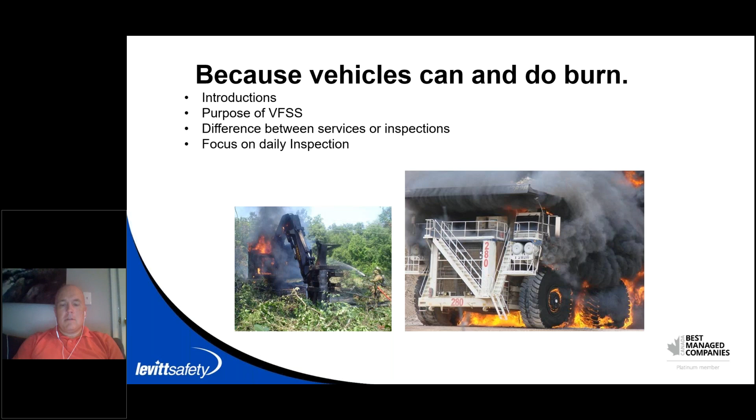So our agenda is, we've covered the introduction, why we have vehicle fire suppression systems on these vehicles, some of the differences between the types of services or inspections, and then really the primary target today is to make sure that we focus on what to do for daily inspections with vehicles.

So of course, we kind of touched on this already. The goal of a vehicle fire suppression system is primarily to protect the operator or passengers of these vehicles. You can find a vehicle fire suppression system anywhere from a mining vehicle, very large items like a shovel, the largest machinery out there, right down into, sometimes they even install them into skid steers. So systems can be very big and complex, or very small and simple.

They can be run with automatic detection systems, or they can be run just as a manual operated system. So they vary quite a bit, but especially when we talk...

Hey Derek, we're having a bit of a hard time hearing you here. So Patrick, if there's anything you'd like to jump in with at the moment while we get Derek's audio figured out, that'd be great.

Sure, no problem. So yeah, just to pick up on what Derek was saying on this slide, basically, if it can roll, it can have a vehicle fire suppression system on it. What Derek was saying is that we cover machines from the largest ones, the large massive hydraulic shovels, all the way down to even the small skid steer type equipment, forklifts, that sort of thing, and everything in between.

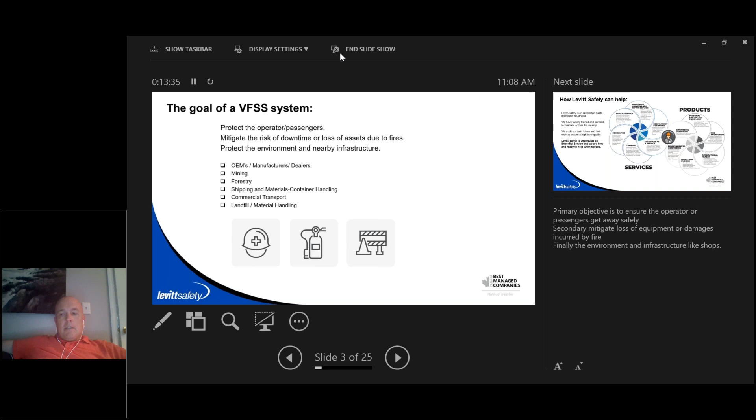In other markets, the machine's not running that often, but like in forestry, that feller buncher is out in the middle of nowhere, and you want the peace of mind that there's a fire suppression system on board to help that operator out in the event that there's a fire. So each one brings its own challenges to the marketplace as far as the demands on the fire suppression system.

I thank you, Patrick, for filling in there. Hope everybody can hear me a little bit better. You're still cutting in a little bit here and there. I guess it was just unstable coming in. Better? Hello? You sounded good, you sound good right now. I sound good now, okay. Don't move, just trying to shrink down. Can you guys also - I had a little bit of an issue on the presentation portion, just so I can confirm, is everybody seeing the presentation only, or are you also seeing my menu? Yeah, you're good, it's just the presentation only now. Okay, great, thank you. So thank you, and again Patrick, for filling in there, really appreciate it. You covered everything better than I would have.

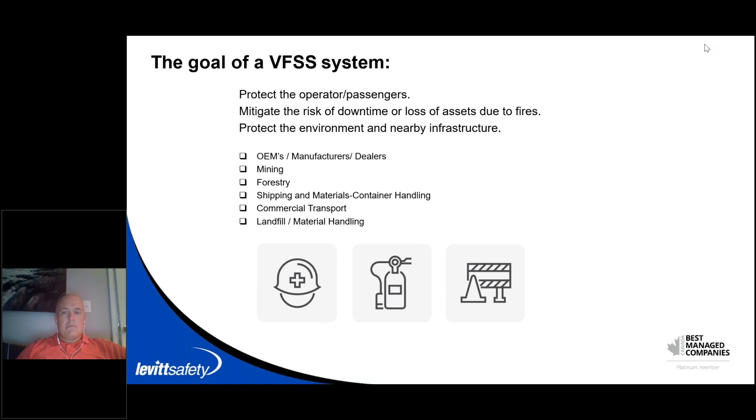So Levitt-Safety is a company - we've been in the industry 85 years as a fire and life safety company, and really been a big part of vehicle fire suppression systems in Canada here for 50 plus years. We have wonderful strategic partners like Kidde who help us bring this to market, and we become an authorized distributor through the Kidde network. That allows us to train our technicians through them, factory trained, and we also do internal auditing of our technicians to make sure they're capable of doing everything they need to do, not only in a classroom setting, but in the field as well. So that's offering you, the end user, the highest level of quality we can assure.

And we're situated across Canada from coast to coast, able to deploy in the most remote locations. Even now, during COVID, we found innovative ways to help support this, whether via FaceTime to a mechanic in the field, or webinars with engineering firms. We've done lots of different transitional things to help support this during a time when we can't necessarily be on site.

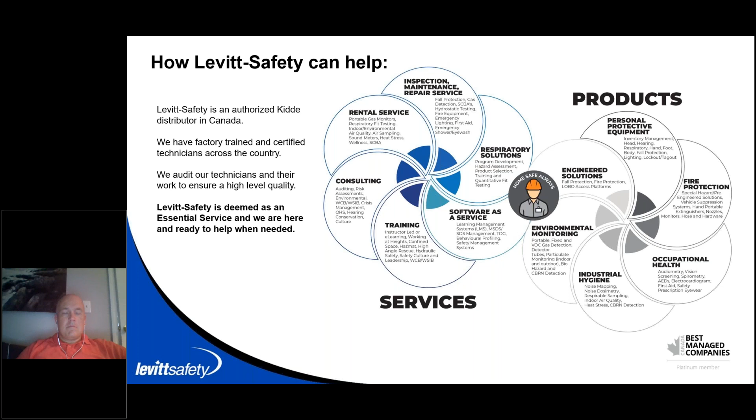So with the service and maintenance overview, I touched on this earlier. There's a daily, weekly, or monthly inspection that's going to be done. That's primarily done by the end user, the operator, or a technician, with different weekly or monthly checks or more detailed daily inspections.

Sorry, Derek. One of the tricky things with working remotely is that we can't always guarantee how great the internet access is going to be. Patrick, would you be able to hop in here? Yes, sure, no problem. I was just going to ask if you want me to translate for all the panelists on the call.

So what Derek was talking about on this slide is the operator, the system owner. They're the frontline maintenance crew, the honorary service crew for the fire suppression system, and we need their support on a daily, weekly, and monthly basis, keeping an eye on the system and making sure it's properly configured to provide top performance on board the vehicle.

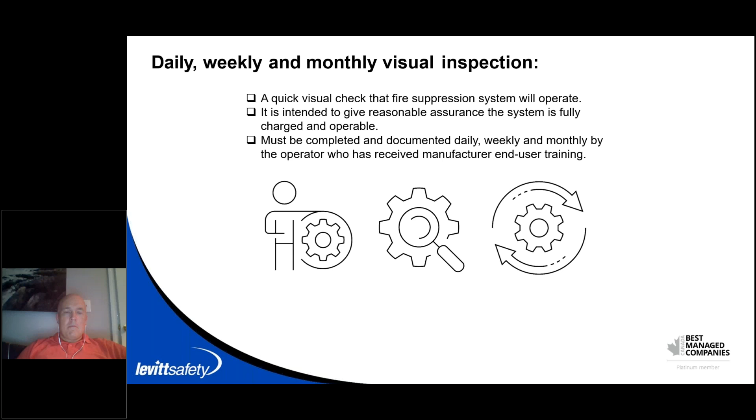As you go into a more weekly and monthly routine, you covered the 6-month or 1,500-hour maintenance portion. This gives us the assurance that the system's operating at its maximum capacity. This needs to be done by an authorized Kidde distributor, and Levitt-Safety would love to come out and do these for you on whatever interval basis works for you.

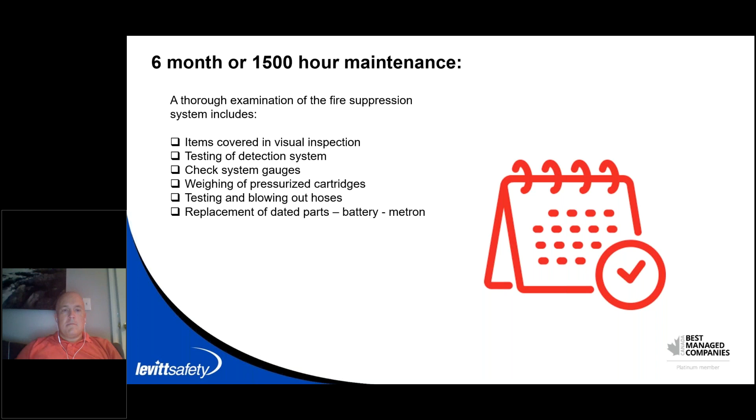In this one, we're doing a little more in-depth work—actually blowing lines and testing all the devices to make sure everything works. So we're bringing that system right up to its full capacity from where it should be at install.

And then on that 12-year interval, as Patrick touched on, we're doing the hydrostatic testing, making sure all the hoses still meet the criteria they need to meet, that the tanks are all in perfect condition, and that the agent, if needed, gets replaced as well.

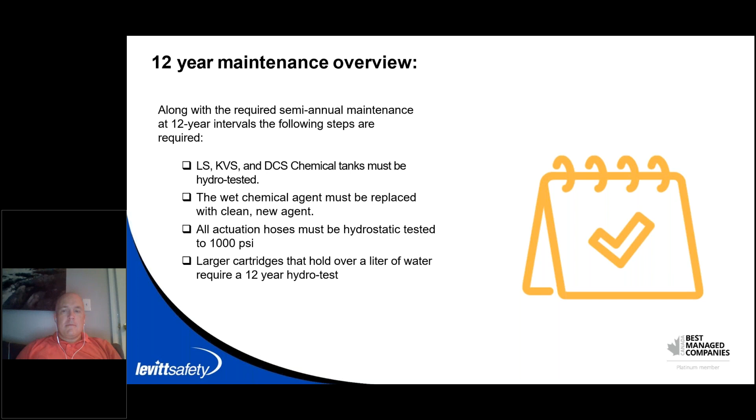Still being able to hear me okay? Yeah, you sound good. Excellent, I finally found the sweet spot.

Okay, so we'll go right into the inspection portion, and I think this is really where we wanted to key in today anyway. From an end user perspective, this is what you should be doing on a daily basis to make sure these vehicle systems are running the way they should.

It's a check for all the components, making sure there's no physical damage or degradation you can visually spot, or anything that looks out of place. For the most part you can use a checklist to go through these components, but if you spot something that doesn't look right, trusting that gut intuition is important too—report those things to your supervisor, who will likely be in touch with a Levitt-Safety person if anything is out of line.

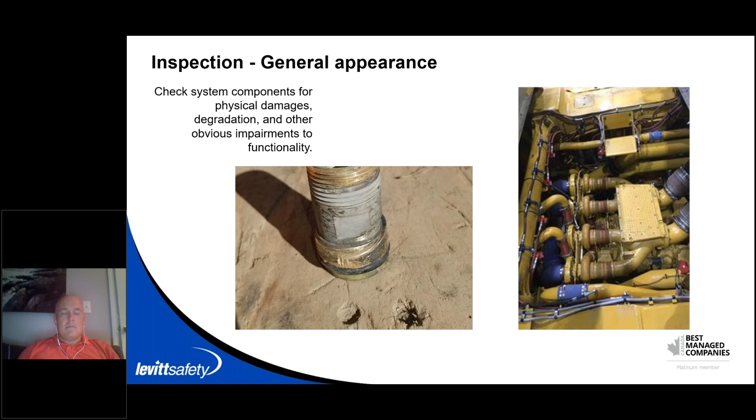The first part—you can do these in any order, and you'll find it'll probably work as an operator comes onto a vehicle, doing certain things at certain points—but we're just going to go through this as we've put it together. You can, of course, vary this in any way you'd like.

So, tanks themselves: there are a couple different tanks out there, different sizes, different shapes. The Kidde line is all a stored pressure unit, so you'll find they all have a gauge on them, and that's one of the things we're going to be checking.

This tank here in the picture has obviously been through the mill something fierce. It's taken extreme damage, but it actually shows a lot of what we'd be looking for in terms of impairments—any obvious physical damage, rust, gouges, dings, or abrasions. These are the extremes, with massive dents and lots of different cuts and abrasions. On the gauge itself, there's a green area that you want to keep that gauge within.

That will fluctuate a little bit with Canadian temperatures as we see extremes of -40 to +40. So there is a temperature differential chart we can provide for those seeing extreme cold, which might come out of the green a little bit, but it's still functional.

Otherwise, you just want to make sure all of the head's in place, that it doesn't look off kilter, that all the hosing going in and out is in good shape and secure, and that the tank doesn't look physically damaged like this one.

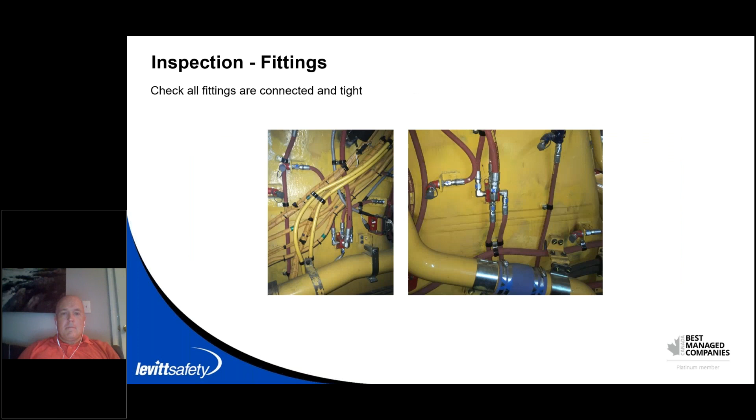From those fittings, that's where the distribution network heads out into the hoses, and the hoses then take it out to all the nozzles. When you're looking at these hoses, you can see how they're secured with P-clamps, and they shouldn't interfere with other pieces, hoses, or wiring that might be in the vicinity. It's important to make sure they stay secured. Otherwise, you might end up with abrasion from hose to hose, or anything else it might be rubbing up against, and that can cause either damage to the fire suppression system or damage to other components of the machine.

So we just make sure those hoses are intact, that they don't have big wear spots, and that they don't crack within your hands. As these things get exposed to multiple different fluids from an engine compartment, or extreme hot and cold, they do tend to deteriorate over time. So it's something we inspect not only on a daily basis from a visual perspective, but also something we look for during our full-on inspection.

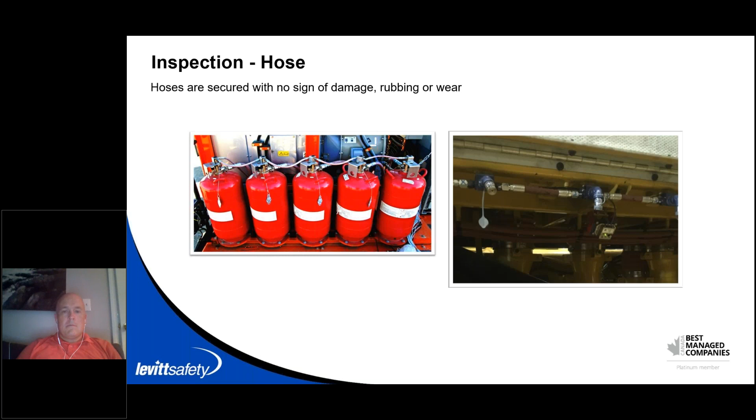These are what you'd be looking for to report to your supervisor should you see anything like this. You want to make sure it gets corrected sooner than later. Don't wait for your next interval if you see some nasty stuff happening.

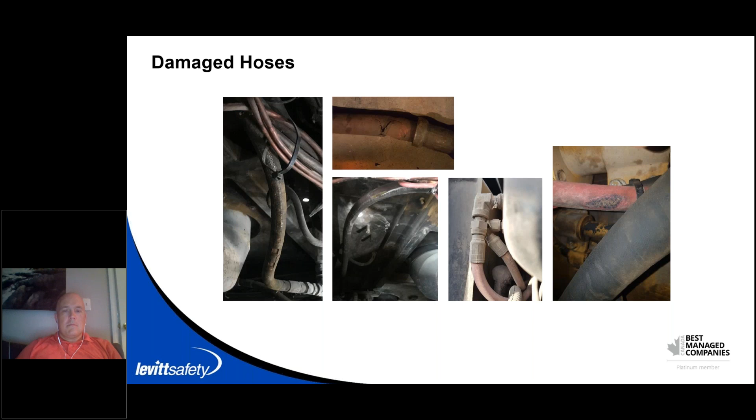The difference is that a pneumatic system offers that ability no matter what the system's condition is. If the panel is offline, you're still able to actuate the system itself. Whereas with electric, you rely on the system being in that powered-up position in order for them to be operated.

You also want to make sure, as it says on the label itself, that the pin is in place and has a seal or indicator that it hasn't been tampered with. We install those during our 6-month inspections, so those should still be in place whenever you come along.

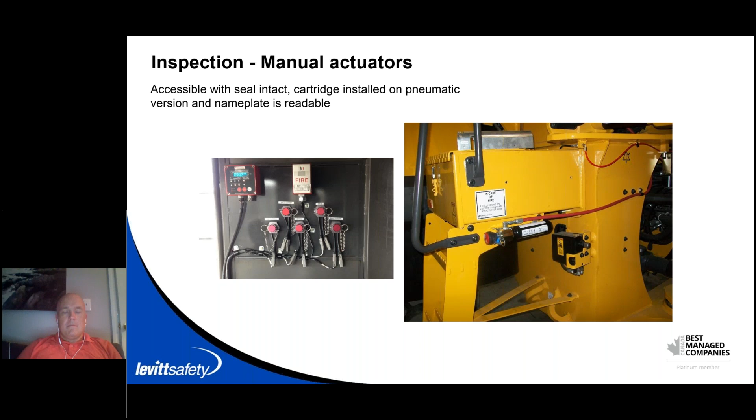They're actually even visible again. So it's important that on a daily basis we're making sure that especially the ones at your points of egress are free and clear of debris.

Discharge nozzles—this is another part of that distribution network. These are very critical in their placement. You want to make sure that when you're looking at them, all the caps are in place first and foremost. That's what's protecting these systems from getting debris back into those hoses, or even water, which can impair the distribution of the chemical.

You want to make sure the caps are in place, and also that the nozzles have a mounting bracket like you see in the pictures, and are pointed in a direction that looks like it's headed towards a turbo, exhaust manifold, or starter, something of that nature—not impaired, like Patrick mentioned in the previous slide, since sometimes modifications happen and suddenly that nozzle is blocked by something stuck in after the fact.

So if you see any nozzles pointing at just a blank chunk of angle iron, for example, that might be a reason or something to bring forward in your inspection notes.

Yeah, absolutely. If it doesn't look right, it's probably not right. That's the short takeaway. And those are all shipped with nozzle caps, and that's to keep the nozzle outlet from getting clogged with debris. So if you see a cap is off, besides just putting it back on, you first want to look inside and make sure you can see the inside of that nozzle, so that when there's a discharge, the agent's got a clean exit path out into the engine compartment. If it's clogged up with mud, or if it's wintertime and there's ice on there, then there's not going to be any agent coming out of that nozzle.

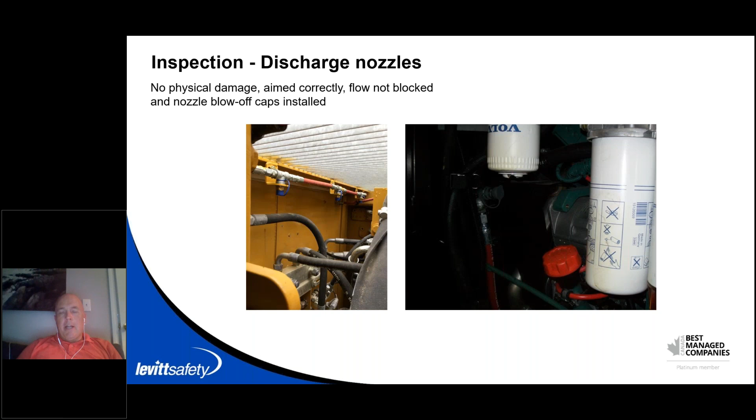Yeah, exactly. So we'll move more over to the electrical side of these systems. As systems get a little larger, or equipment gets larger, the system usually gets a little more complex as well, and that's where you'll find a need for different types of panels.

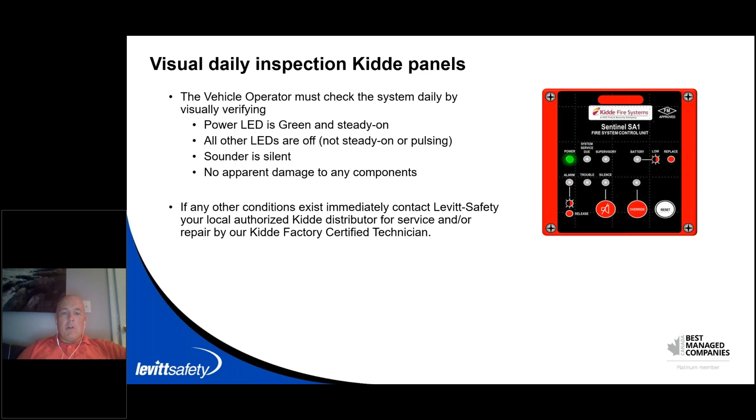And the only other thing I would say is, from talking to our distribution network over the years, these panels seem to be a magnet for hats and lunch boxes, coats sometimes, and you really want to make sure, just like the actuators, that there's clear and unobstructed access to these things. So they're easy to quickly see, and there's some level of interaction the operators can have with a silence button or an override button on there. So it's important that it's not covered up on a day in and day out basis.

And some folks think that it's an entertainment system, and they try to open these up and hook up their iPhone or other media device on there and listen to music or something like that, or they do other things to it, and it's not there for entertainment. Its job is to make sure that the operator is safe and the vehicle can return to service every day, and that's its job. It doesn't want to do anything else but that. So just let it do its job, and then you can do your job.

Yeah, right. And again, that takes me back to my days in the field, where these are very often used as some sort of hanging system for various things, whether it's a hat or a paper towel roll or something. But yeah, make sure that we're not obstructing them. They're there for a very critical reason.

And who knew that 3 red cherries weren't a winner?

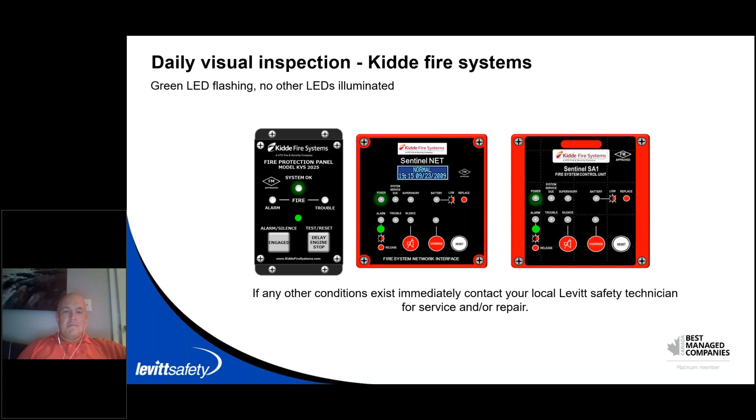So coming off the panels, one of the things that we do is an automatic detection circuit. These circuits come out from the panel. They're monitored so that we know if they've been compromised, and they operate in a normally open, normally closed fashion. So that'll send the signal back to the panel to let us know if there's a condition in the system and set the panel off.

The detection system is what gives us the capability of detecting fire scenarios at an earlier stage, usually, than if we're just reliant on an operator visually seeing smoke or something of that nature. This can pick up heat, that sort of stuff. And it's really critical that if we have one of these, we're making sure that the circuits themselves or the devices are in good shape.

So there's some different methods. There's linear detection, which is a fixed heat, and you want to make sure that linear wire is strung through a compartment the way that it should naturally be going. It has all the bracketing in place, that it's covering over components of the machine like the turbo or whatnot, but not too close in proximity. If any of those brackets are broken, that could also hinder the ability of it to function properly. So you want to make sure that it's not cut or doesn't show signs of heat or even abrasion.

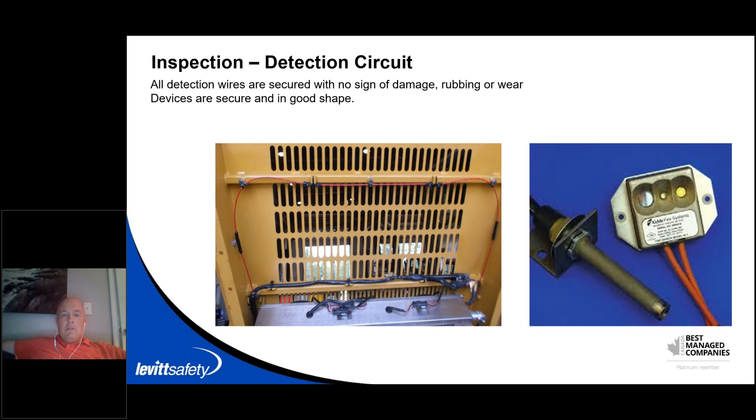Here's some good examples of damaged detection wire. You can see here where you've had some heat issues or abrasion. Some of them might not show obvious heat damage, but you can see the darkening of color. Sometimes that happens through time.

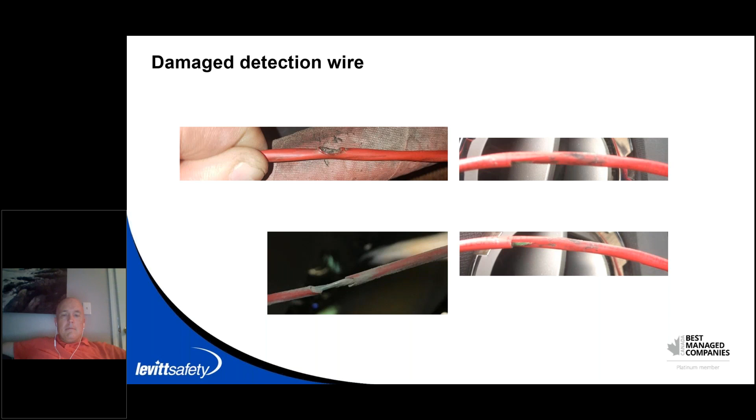The way these things work is that they're shielded wires, and once they reach a certain temperature, they make a connection, putting it into that closed position, and that's when the system will go off. So as a daily check, you want to make sure those things aren't happening. If you catch it before it happens, it'll prevent false discharges. Something to really look for when you're walking through your vehicle.

You just want to make sure all that wiring is secured very well, that all the connections are in place. If you have the time, this is probably more on a weekly or monthly basis, more of a mechanic sort of thing. Give each of those connections a little tug or even just a wiggle, make sure they're not falling apart. We primarily use Deutsch connectors, so make sure they haven't come apart. That's all very critical to do.

Some other things you'll see out there are the horn and strobe equipment, where it's important to let people around know the system has gone off, not only from the cab but around the entire vehicle, so you can hear it and visually see it. These should be visible, and you want to make sure the strobe's clear. During an inspection, we would check that the audio is in place, that they're still hung and secured.

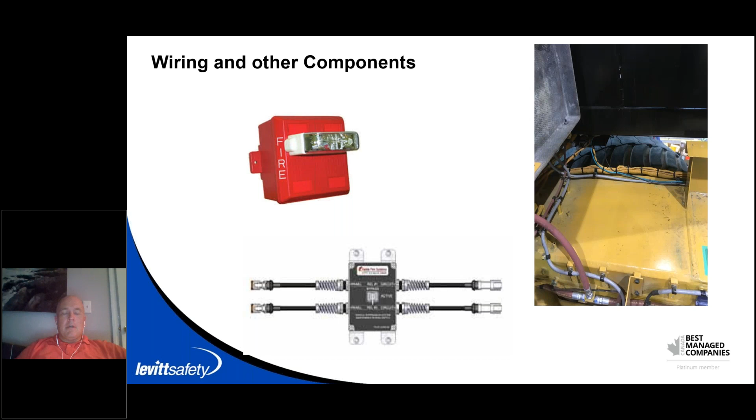On the maintenance bypass switch, or any of the other electrical connectors, like you said, most of those are all Deutsch connectors these days. You want to make sure those connectors aren't cracked, that they're clipped in with a tight connection. If you see any damage to those, then that unit or that stretch of cable should get replaced. But otherwise, I think you hit it all well already there, Derek.

We'll wrap it up - as I mentioned at the very beginning, you might build a routine or checklist so that you go through the same things in a way that makes sense as you walk around a vehicle. From a systems perspective, these are the things we've touched on that you want to make sure you're checking. There are various forms of each of these - these are just some depictions to give you an idea of the layout of a system.

On a system with automatic detection, we have a panel. You don't necessarily need automatic detection, but you might have just a panel as part of the operating procedure. From the panel, that moves out to your manual or pneumatic actuators, which tie back over to your system cylinder. The system cylinder can also be actuated electrically from the panel, and from there the system will move all of its chemical out onto the rest of the unit via a distribution network. We touched on the fittings, the distribution blocks, the hosing, the nozzles - those are all key components as you walk down that portion of the system.

And then on the other side of it, we go over towards the electrical components, and that's where you'll see things like the bypass switch or a horn and strobe for alerting people. You also see some electric actuators, and you'll also see that detection circuit. Part of that detection circuit is the wiring. So you want to make sure that all the system's integrity as a whole is actually in good shape.

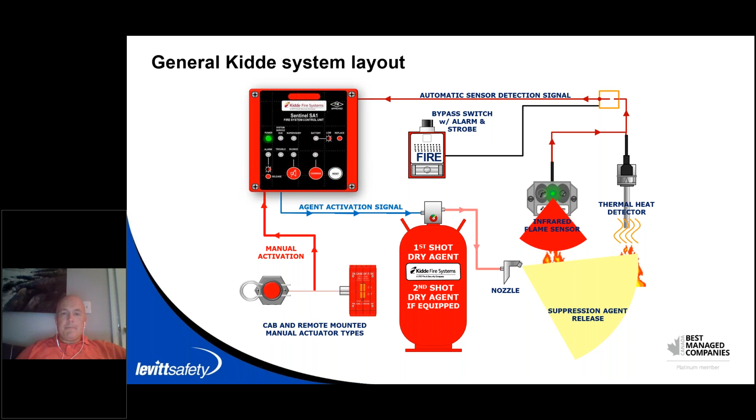Such a critical point there, Patrick, you hit the nail on the head. The daily inspection is going to catch things in its earliest stages, and that will make sure your system is in its maximum operating capacity. So if we do find damage on these units, make sure you're informing your supervisor, and that supervisor would then be in contact with Levitt or the authorized distributor. From there, we can decide on a path to make sure we get these systems back up and operating to the capacity they need to be a critical life-saving device.

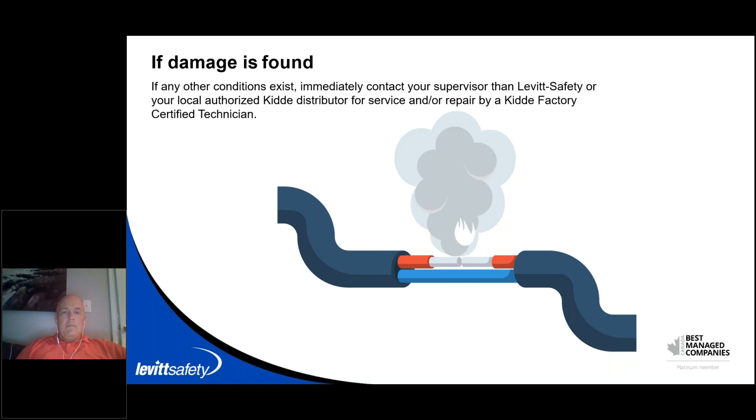So with your system, your owner's manual usually has a checklist there for your daily inspections. If you require a modified version, please get in touch with your local Levitt-Safety representative. I'm sure we can find something for you to do your daily checklist or develop a plan with you. Just make sure that you're recording these. It's critical, you can go back and see how a system is functioning, or if something is continually being a cause of problem. These are the reasons we record these things in actual paper form or electronic nowadays.

Anything else you'd like to add, Patrick, before we turn this over to questions? I think the one thing I would add is, when you're completing the log there, you should also have with that paperwork the last inspection performed by either Levitt or another Kidde distributor, and you want to make sure that inspection is not more than 6 months or 1,500 hours ago.

As I said, time is always the challenge, and the longer the system's left unattended without the proper maintenance and inspections, over time, time will always win out and defeat the system. So make sure when you're doing your inspections and your log, just check that paperwork on a monthly basis, and say, yep, it's only been 3 months since the system was last inspected, we're fine. But if you pull it out and it's been 12 months, a year and a half, that system's way overdue for an inspection by Levitt or another Kidde distributor.